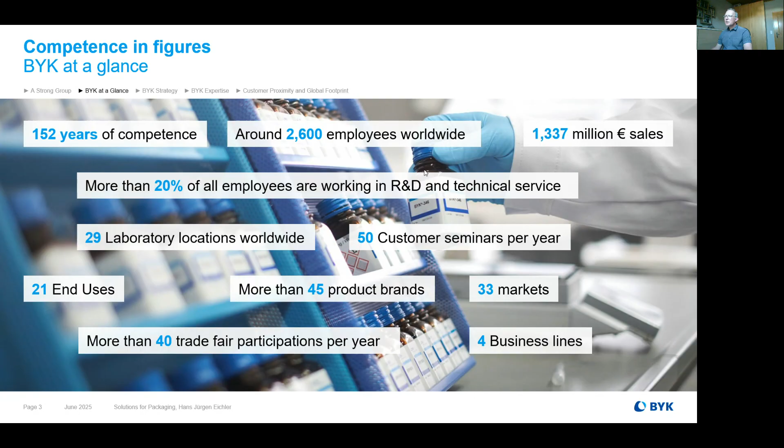A few figures here show how big our company still is and what we are doing in sales. I don't want to bore you with all these figures, but interestingly, we are 2,600 people worldwide. We have 1.4 billion euro in sales. We have different laboratories all over the world, and different production places all over the world.

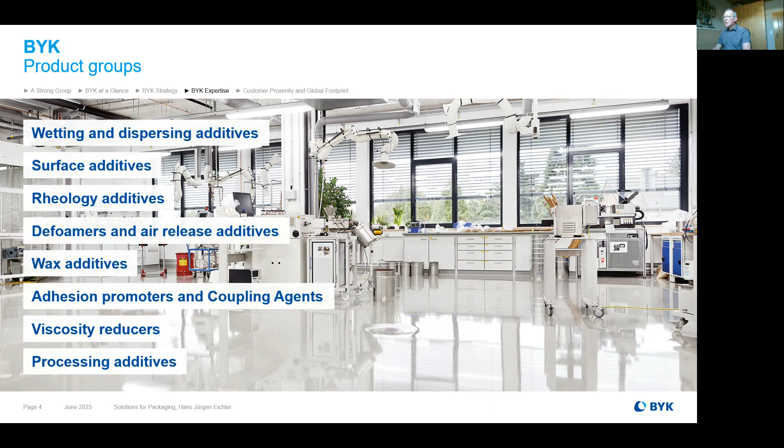The main groups which we are still producing are wetting and dispersion, surface additives, rheology, defoamers, wax, adhesions, viscosity reducers, and processing additives. But that's not all for plastics—BYK is quite great also in the paint business, and I will touch that point a little bit later on. But the main focus for today should be plastics.

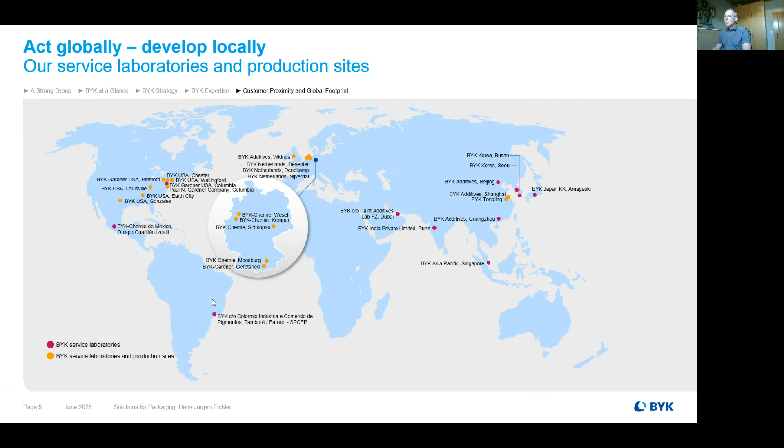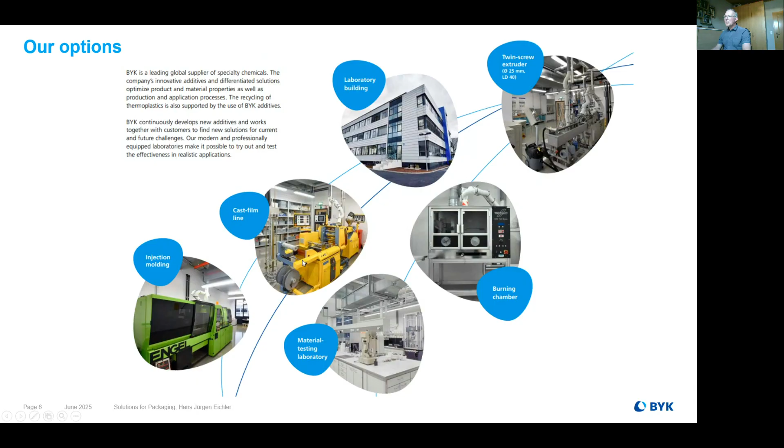Coming now a little bit closer to what we are doing in plastics, you see here our facilities—that's our lab, where we are on the ground floor. That's still an old picture from our twin screw extruder. We have burning facilities to check different flame retardants, a cast film line, injection molding, and several other things to test in our laboratories.

One of the major points I want to touch is that we have 5 thermoplastic brands, let's say it that way. We have BYK-MAX, which are solutions to optimize processing and improve material properties like flame retardants and UV stabilities. Beside that, we have products called BYK that are classical solutions for wetting and dispersion, release additives, rheology and viscosity. And we have our brand called SCONA, which is an adhesion promoter, compatibilizer, and coupling agent.

We have Cloisite, which is a modified phyllosilicate, sometimes called clay. That's used in thermoplastics as a flame retardant, and it might also improve physical properties. Beside that, it also improves barrier properties.

The last brand we have in our thermoplastic group is RecycloBYK—that's still speaking for itself, I think. It's mainly formulations which increase the quality of recyclates. So today I want to focus on not all the brands, because then it would take hours before I have to stop. The major points today are SCONA, so compatibilization and coupling agents; Cloisite, the improvement of the barrier; and beside that, the BYK-MAX materials to optimize processing and mechanical properties.

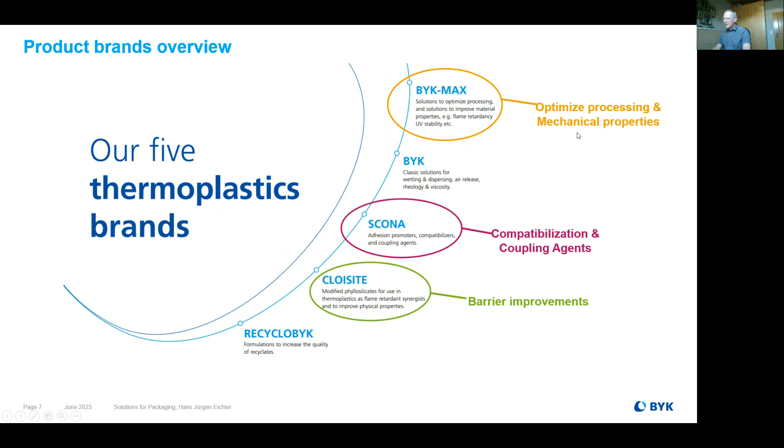Starting now with a short introduction: if we speak about packaging, the major drivers we see in the market are still source reduction—meaning down gauging, lightweighting the packaging—and of course simplification of packaging materials, so color design, and it might be interesting to have mono materials.

The major polymers we see in the market right now are PET, PE, and polypropylene. Besides that, biopolymers are getting more and more interest. There are a few materials which seem to be banned, especially fluorinated substances. Also in packaging, there are issues with processing additives, and of course the recyclability of multi-layer materials. Those are the major points we see in the market for plastic packaging.

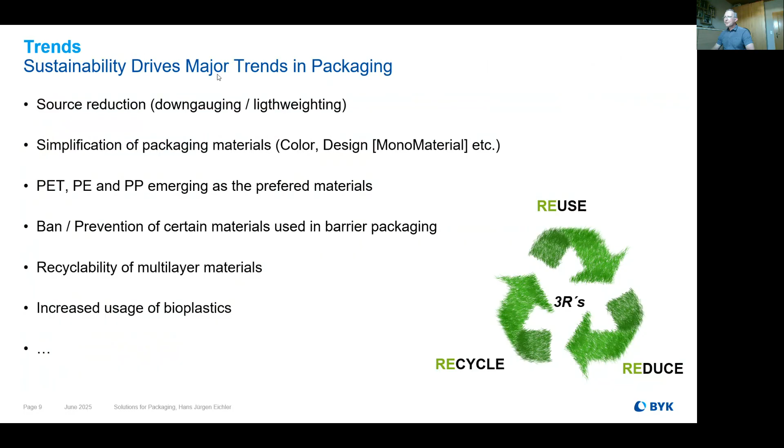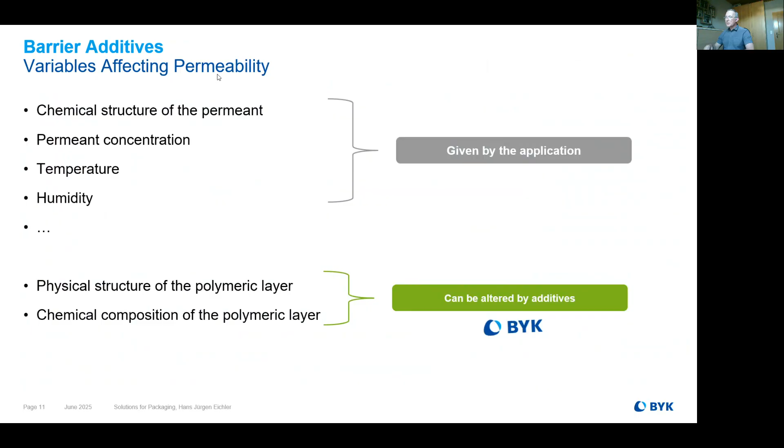So if we focus now on barrier additives, there are variables affecting the permeability. There is the chemical structure of the permeant, the permeant concentration, the temperature, humidity - all that is given from your application, meaning your packaged good which you place in the plastics. Besides that, the physical structure of the polymeric layer is important for good barrier properties, and the chemical composition of these polymer layers is of interest.

How is the permeability measured? There are two important things: one is the water vapor transmission rate, the WVTR, and besides that, the oxygen transmission rate. Those are the major things of interest in packaging goods. And here you see...

A simplified working mechanism of the equipment used to check the barrier properties. You have the film inside, you have the flow of material, call it the carrier gas, and you look at what is passing through the film. Then the water vapor is taken with the flowing gas into the sensor, and it starts to measure the water vapor transmission rate.

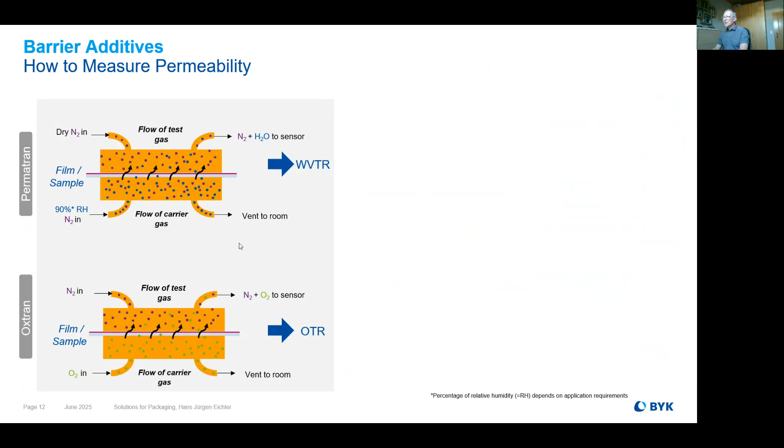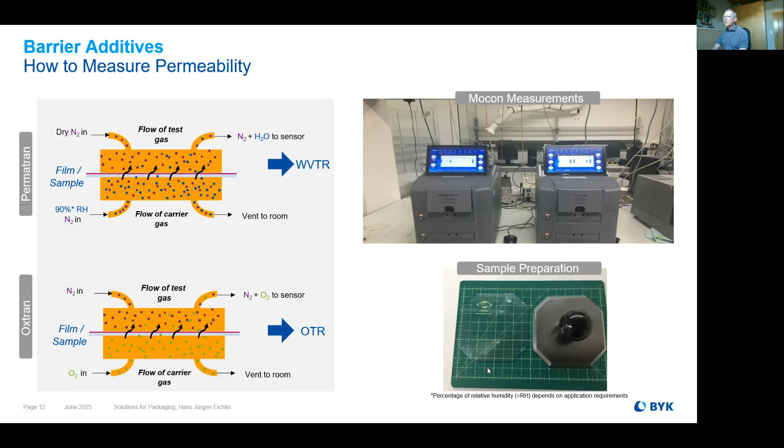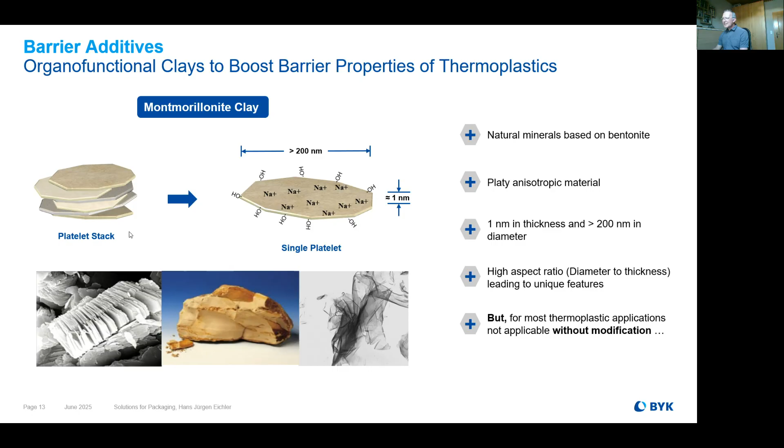We speak of a thickness of about 1 nanometer for one of these pages, and 200 nanometers in diameter. That means the material has a huge, high aspect ratio, which is quite important to get real performance in terms of barrier properties. But the problem is, if we dig it out of the ground and place it into the plastics, we will never get good values, because we need to modify the clay with some organic material.

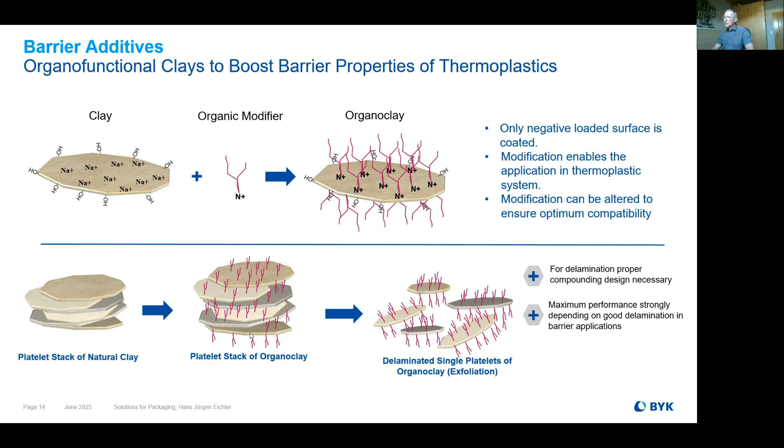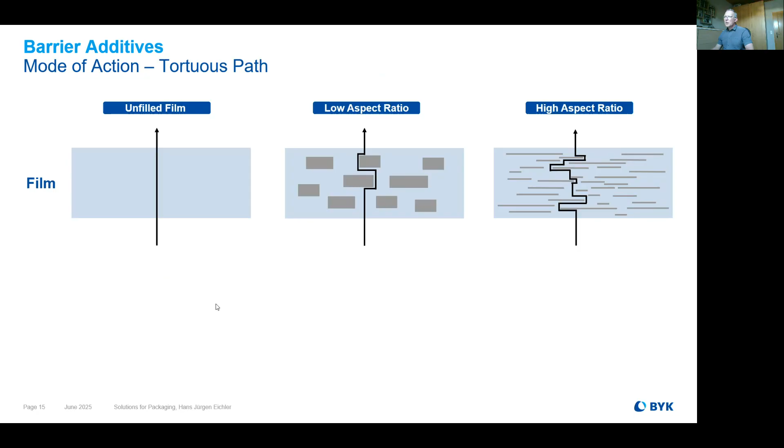With that said, let me give you an idea of how this mode of action works with this mineral. The simple way: you have your film, you have your gas, which passes through without any big issues, coming from this side and going over to that side. So there are no real barrier properties in that case.

If you have minerals like calcium carbonate or talc, they have a low aspect ratio. What happens when you disperse them in the matrix? These gray parts represent the minerals, and the gas passes around them. If you have a product with a high aspect ratio, the gas needs to take longer paths around the particles - and that's exactly what our mineral does. If well dispersed in the matrix, it increases barrier properties due to what we call the tortuous path effect.

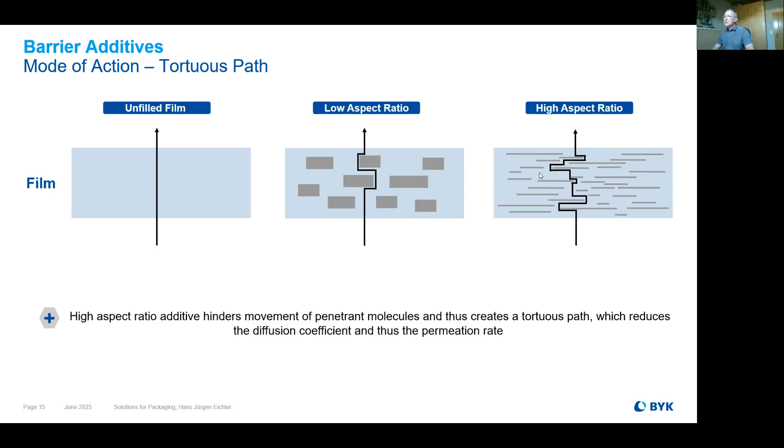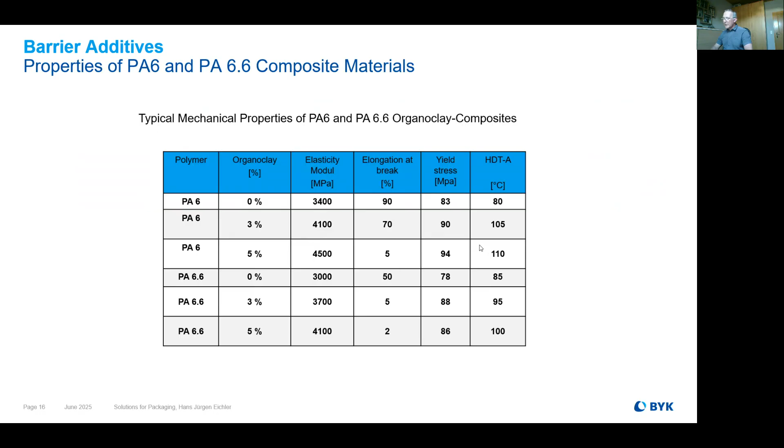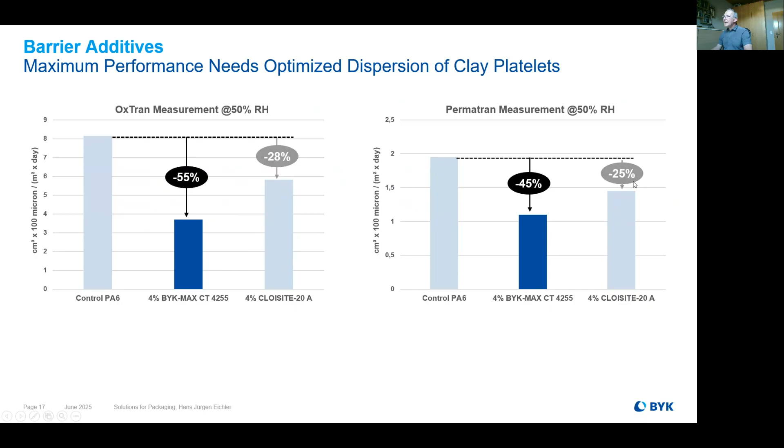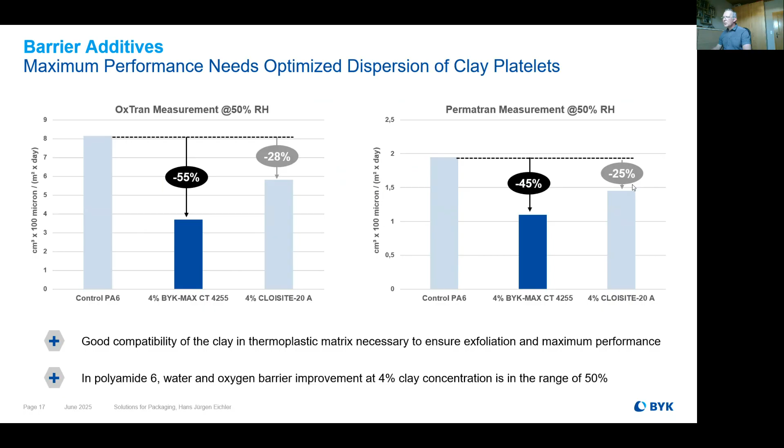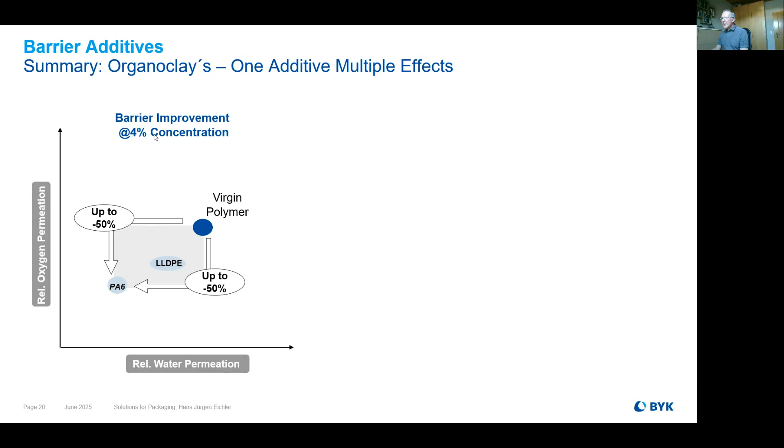And here you get an idea what these polymeric modifiers are able to do. They can work as dispersants, and beside that they can also reduce warpage - that might be interesting for color masterbatch, especially for closures. Beside that, this modifier can be used as tie layers for multi-layer films to improve adhesion between non-compatible materials, or it will increase metal adhesion in film applications. Beside that, it can work as a coupling agent for fiber filler and act as a reinforcing material. It might also be used as an adhesion promoter for elastomeric components, for example for toothbrushes or grips of boxes, something like that.

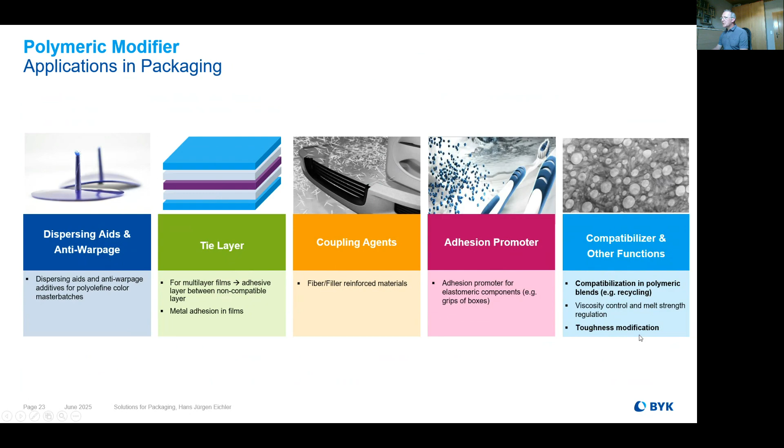And one very interesting part, especially for recycling, is compatibilization. That means if polymers like polyamide and polyethylene, for example, which don't like each other, are in a recycling material, these modifiers still work as a compatibilizer. It can also work as a viscosity controller to improve melt strength - that might be very interesting for biopolymers. And beside that, these materials are also used as a toughness modifier, for example in polyamide.

So if we look now at a use case of these compatibilizers, you still know that the recycling of multi-layer materials is really hard work to do. And to overcome these issues, especially if you have this big mixture of different stuffs, you get something which is inhomogeneous and has poor compatibility. It is very poor in optical or mechanical performance if you want to make films again out of that.

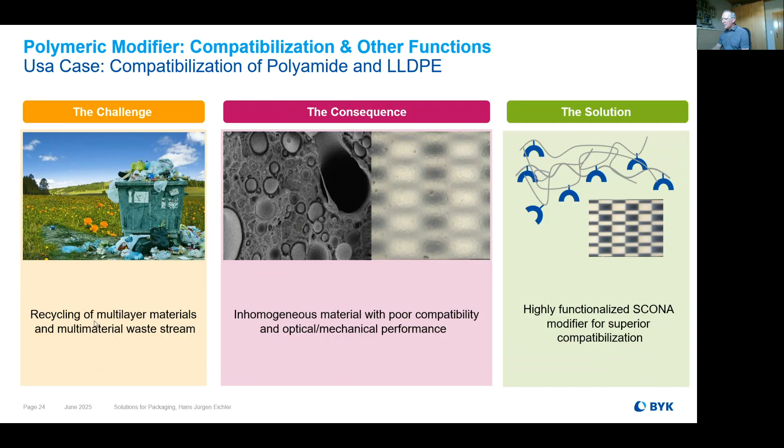Our solution is to work with these functionalized Scona modifiers, which work as a compatibilizer. So here is how it works. We have the Scona modifier, and here these blue half pipes represent the functionality group, meaning we have a maleic anhydride group. For example, if we have a polyamide which has an amine group on one end, it can react with the maleic anhydride.

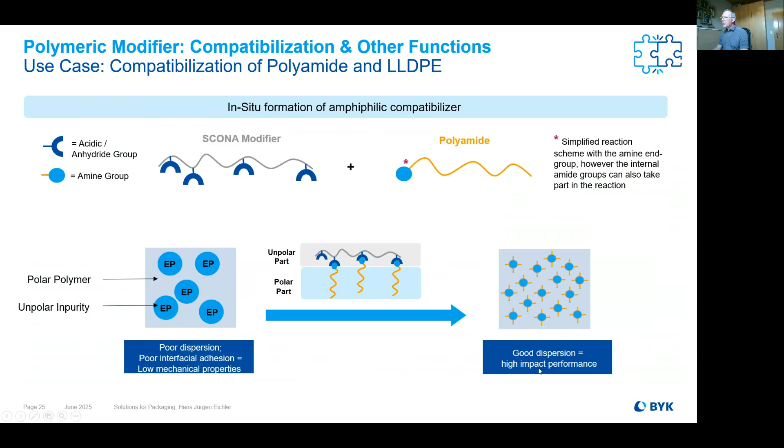What is going on then is you have a compatibilization between the different phases. So you have an unpolar and a polar part which are now really bonded and nicely dispersed, with high impact performance. What that means in a mixture of polyamide and polyethylene, I will show in a few minutes.

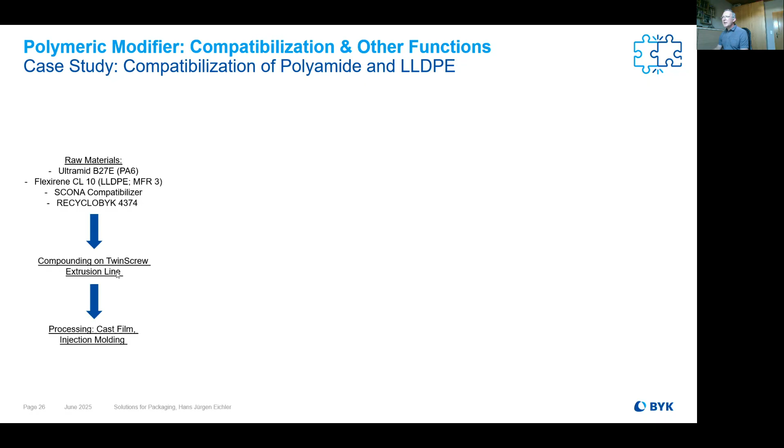So we have done some work with a standard polyamide 6 grade and an LLDPE. We used our Scona compatibilizer and a RECYCLOBYK grade, and did a compounding on a twin screw extruder. With these granules, we went over to our cast film line and did some injection molding, and what we saw as a mechanical properties improvement, you see here on that slide.

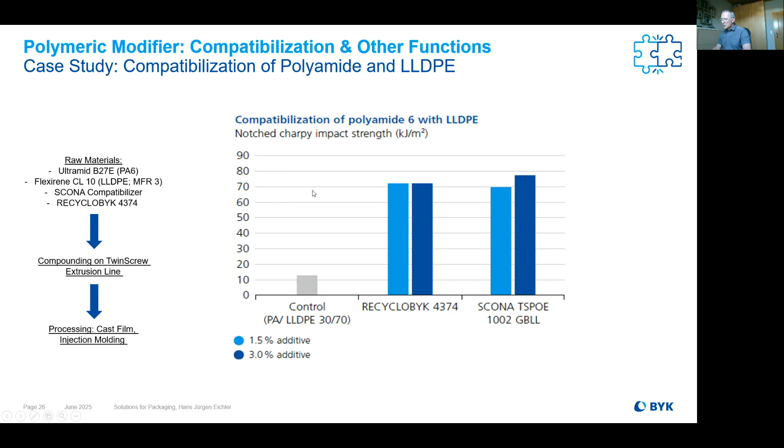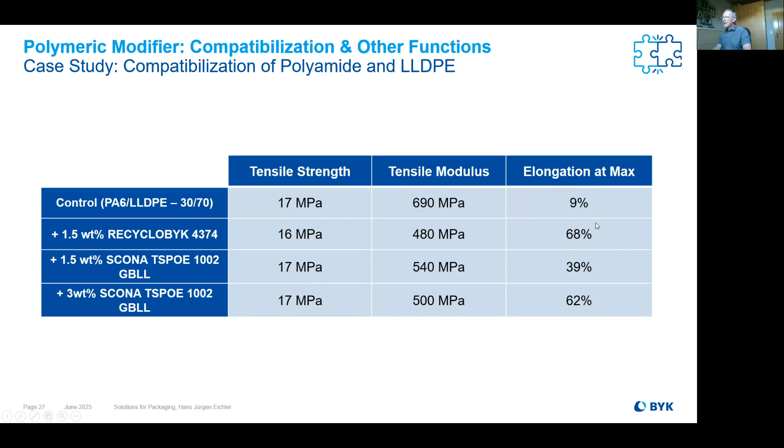Also here an idea for the other mechanical properties, for tensile strength and tensile modulus and elongation at maximum. So you see, especially for the elongation at max, a really nice improvement with our different additives.

So what we found out during our experience, the optimum modifier concentration is already reached in the region of 3%. Especially here for the mixture of 30-70, the notched impact was really increased by a factor of 6.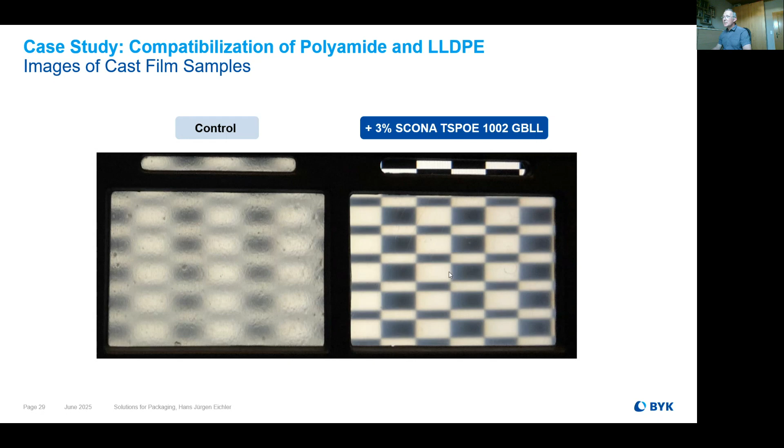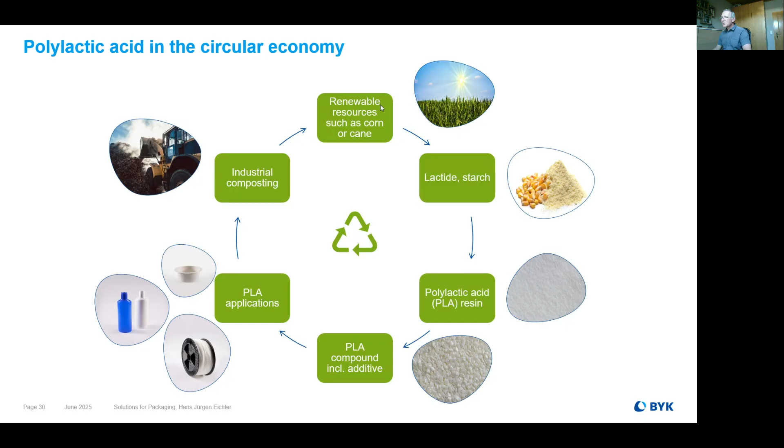The next part which I want to present is the PLA. As you might know, it's still a biopolymer, and especially this kind of polymer is increasing like hell in case of packaging goods. It has a lot of good opportunities, but one of the weak points is that the mechanical properties of this material are not the best. I will show you later on what that means.

For this reason, we have also modifiers which are called the TPPL series. What they are doing is they are still based on a PLA polymer. And we did, you remember our toolbox modifications, with this PLA polymer we were able to run up a modification or grafting with a maleic anhydride, with a GMA, so an epoxide functionality, or an acrylic acid functionality. You see how the materials look like.

It's more or less a powder which we are producing out of these modifiers, and coming now to the point of what it's still doing in PLA.

As I said, the PLA is still bio-based and biodegradable. It has good mechanical strength and high stiffness and medium heat resistance. It is transparent with good printability, but the major weakness for this material is it has low melt strength and melt elasticity. Beside that, the flexibility, or impact strength, is really limited.

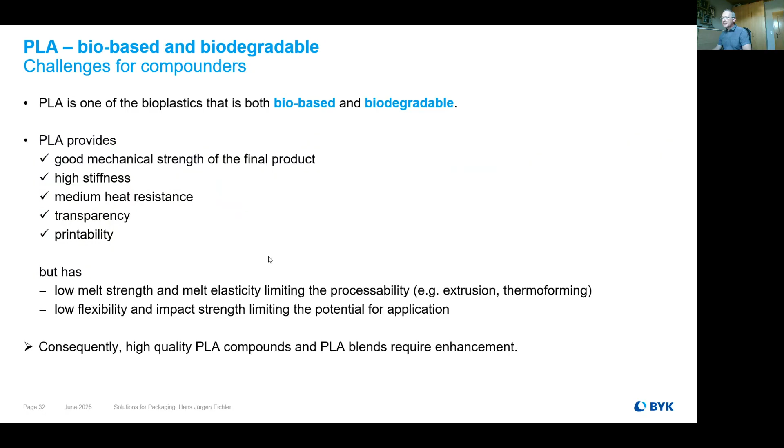That's the reason why a lot of people do mixtures with PLA with different blends. And here is coming now the point where our product might help. I will show you what that means.

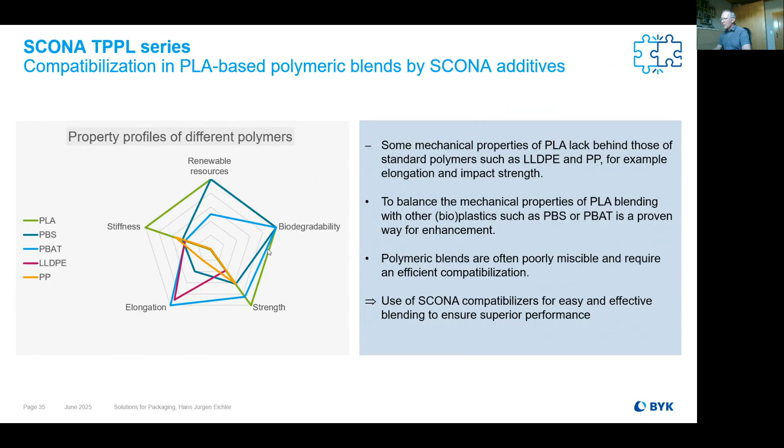And here again our SCONA compatibilizer can help incorporate these different bio-based polymers, same mechanism like I showed for the polyamide PE modification, but now we have other partners to play around with. We have, of course, again a maleic anhydride SCONA material, and we have a blend partner, which might be the PBS or PBAT. The SCONA PLA modifier reacts with the blend partner and creates a good dispersion and improved mechanical properties and adhesion from the materials.

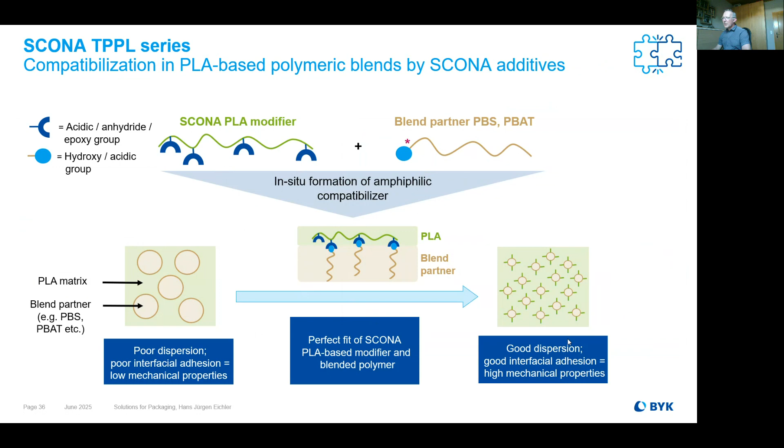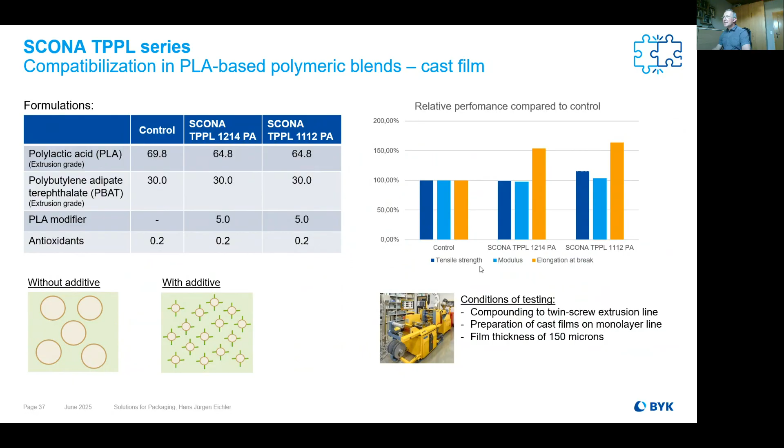That's what you see here on the figures. We did a mixture with PLA and PBAT with nearly 70 and 30. We added some antioxidants, and we placed in here the PLA modifier. The 1214 is a GMA material, and the 1112 is an MSA grafted material. You see here the improvements in elongation at break with similar values for the tensile strength. This gives you an indication that these products help bring better compatibilization between the polymeric blends.

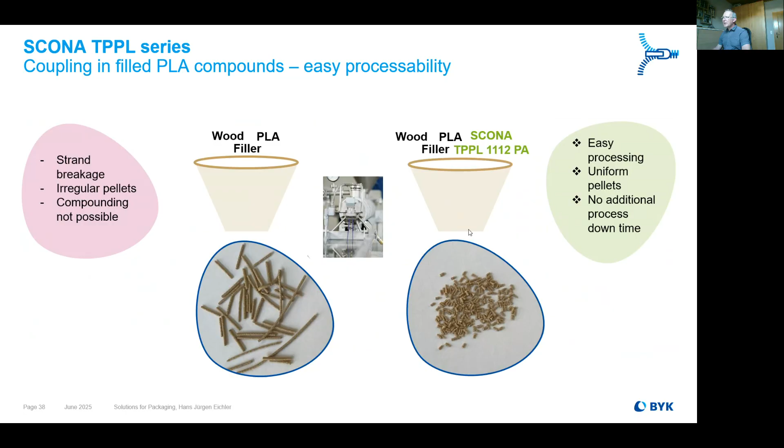Besides these polymeric blends, PLA is quite often filled with wood as a filler, and here the SCONA materials can work as a coupling agent. There is a bonding between the MSA group and the OH groups, which are quite abundant on the wood. This gives better bonding, meaning better mechanical properties and reduced water pickup. All nice things to have in a wood-filled system.

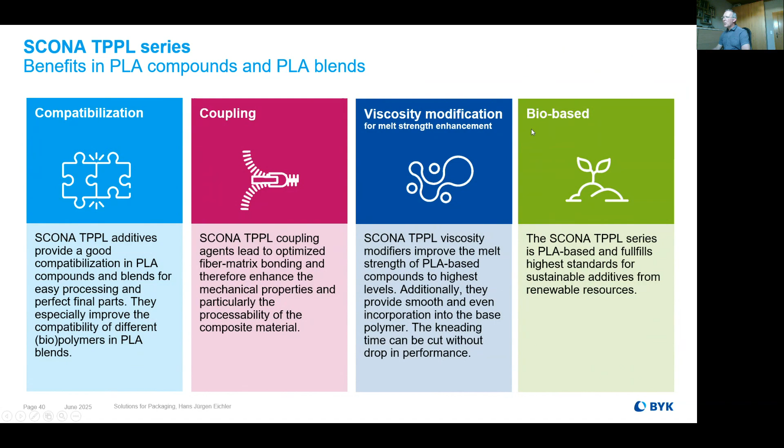So what we can say is the benefits from our PLA grafted materials is it can work as a compatibilizer between the different polymers. It could work as a coupling agent if we have, for example, fiber matrix bonding needed, or it can work as a viscosity modifier to improve the melt strength. And the interesting thing is, of course, all of them are still bio-based and also biodegradable.

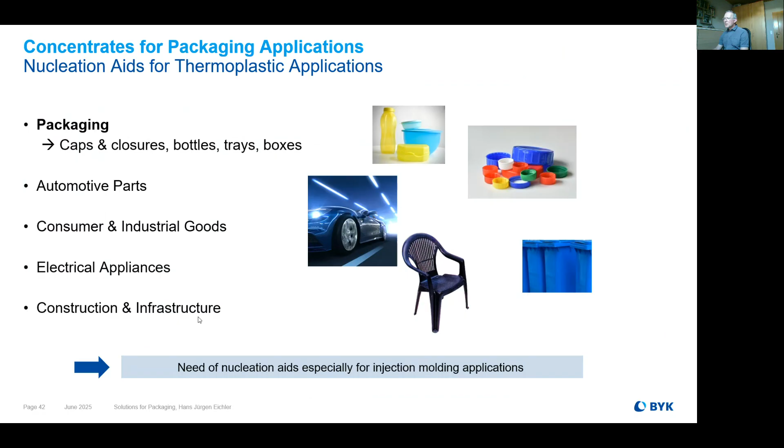Coming to the last point of my presentation with the nucleation aids, you might know that these nucleation aids are still often used in thermoplastic applications for caps, closures, and trays or boxes. So you see these different pictures here. In application, it means it is quite often used for automotive, electronic parts, construction - anywhere injection molding is taking place. We have two grades, I should say.

The functionality is, of course, nucleation. We have this BYK-MAX NU 4230, based on a polypropylene or based on an LDPE, depending on the polymer you're using. The processing methods are quite huge, so it means you can use it for blow molding, injection molding, extrusion. It's based on pellets. Typical dosage is between 1 and 5%. This 4230 material is just a combination of output and dimension stability and quality improvements.

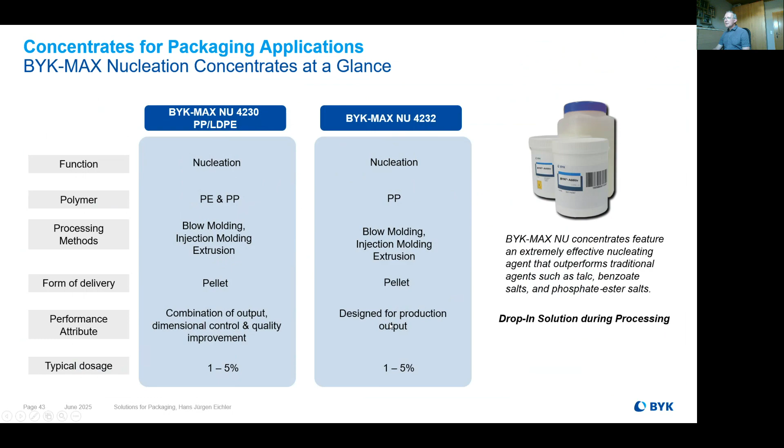Compared to that, we have the 4232. That material is based on polypropylene, and that's designed to improve the output. I will show you in a few minutes what it means.

So generally spoken, what are the nucleation agents doing? If you have non-nucleated polypropylene, for example, the nucleates start to build up huge and small and very inconsistent particle size of the crystallinity phases. So that means the mechanical properties could also be reduced.

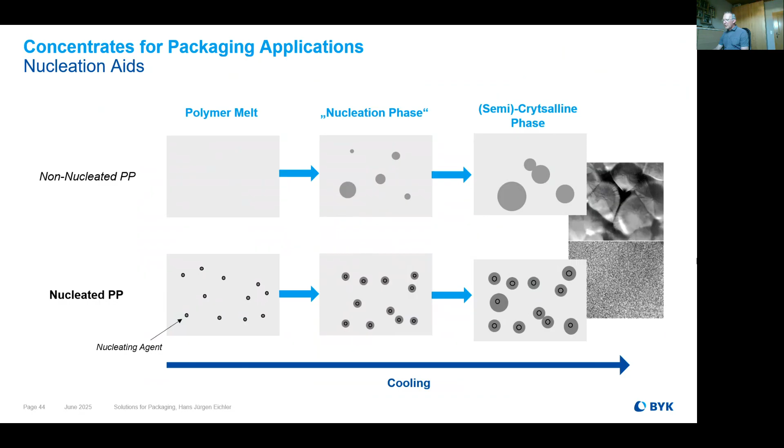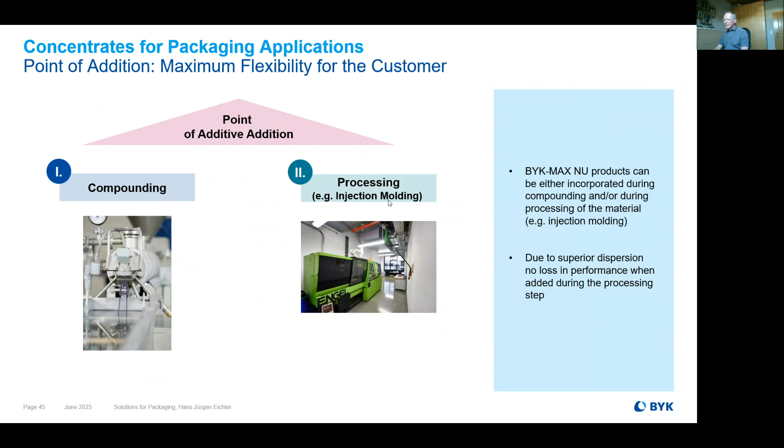If we have a nucleated polypropylene, with the nucleation we can control the size of the nucleates, meaning the crystallinity phases are really controlled, and we have a unique view on these things. That really improves mechanical properties and also helps improve the output on the machines. So the materials can be used during compounding or also during processing - it's very general use of the products.

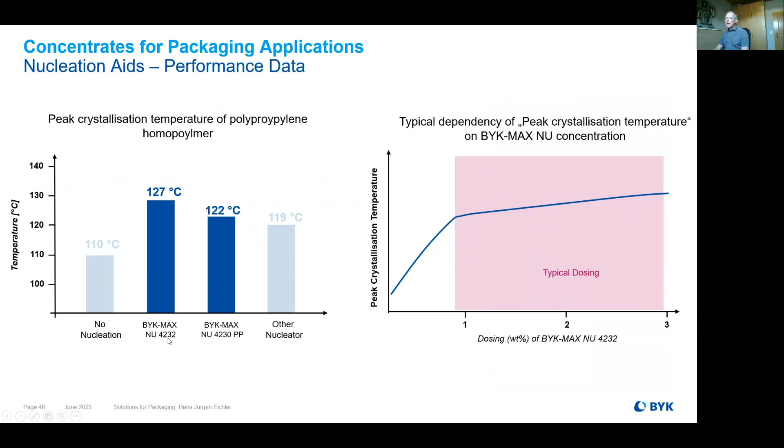And if we start here and look into the processing, you see the 4232 is just a product which has a very nice and high peak of crystallinity. It's 127, higher compared to what we have with a non-nucleated material, meaning you are able to form out your products quicker. The 4230 also has nice improvements, but not on the same level as the 4232.

If we check now mechanical properties, you see now the advantage of the 4230. This is shown here in tensile modulus and in tensile strength. You see that the values from these products are at a slightly higher value compared to the 4232, which is doing a quite good job. But as I said, 4230 is optimizing mechanical properties.

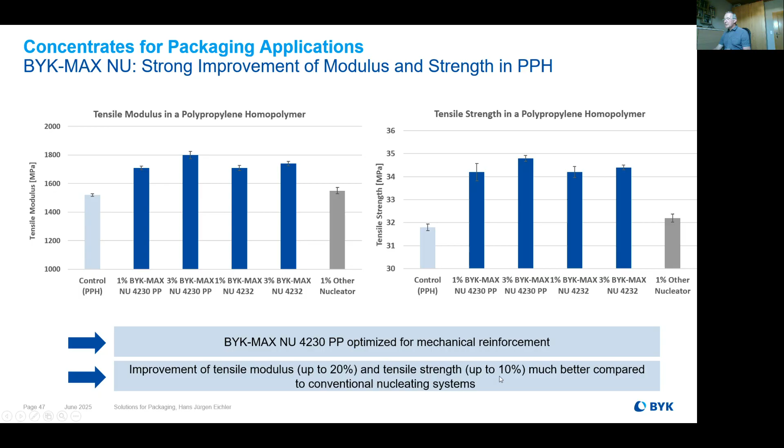On the gray side, you see other nucleators which are also doing a good job, but compared to our material, we are more efficient, also with lower amounts. As a summary, in case of the tensile modulus, we can really increase it up by 20%, and tensile strength is increased up to 10% with both materials.

So that is the benefits of the nucleation aids: it means you can reduce the anisotropic effects, so it might reduce shrinkage, and keep your dimension tolerance and warpage reduced. So effects which are coming with pigments, especially phthalo pigments, are tending to cause warp. The nucleation effect will help here from the nucleation agent to overcome these points of the pigments.

It will increase the crystallinity and might improve the stiffness and impact, HDT, and CLTE, and of course the cycle time is reduced, meaning you get more parts out of the mold and you can form it out quite soon.

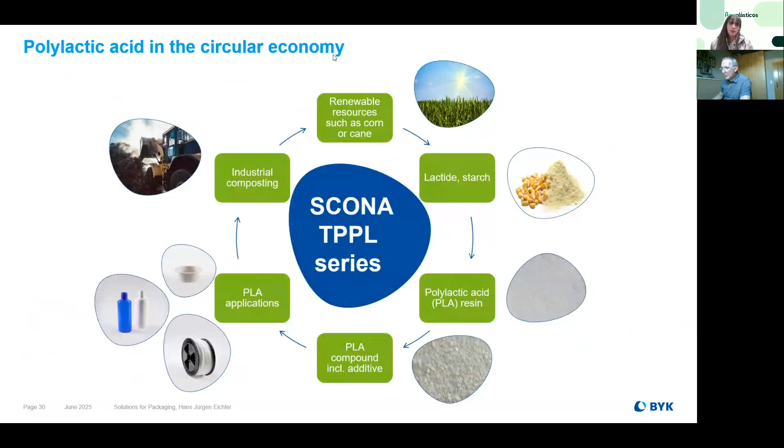Okay Hans, thank you. They're asking a little more about whether these clays reduce oxygen transmission. Yes, that's still used, as I showed here a few slides ago. Here you see the Cloisite 20A used in an LLDPE. Here's the water vapor transmission, and here is the oxygen. You see with 4% of clay, you get really a 30% improvement for the oxygen.

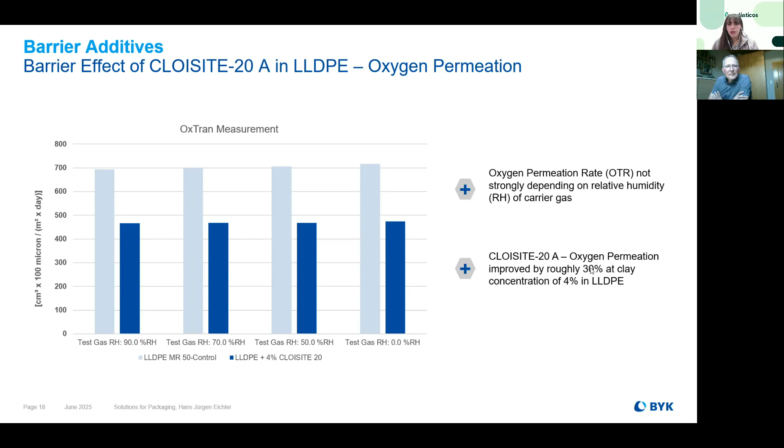Okay, we have another question. Can the SCONA for PLA be used directly into the extruder, or is it better to pre-process it? It should be processed in a twin screw extruder. It needs a real compounding step to introduce these materials to get out this strand widening. It's not enough to work with it as a compound or concentrate. It needs really a compounding step, meaning a twin screw extruder. In a single screw, I don't expect it gives the full performance.

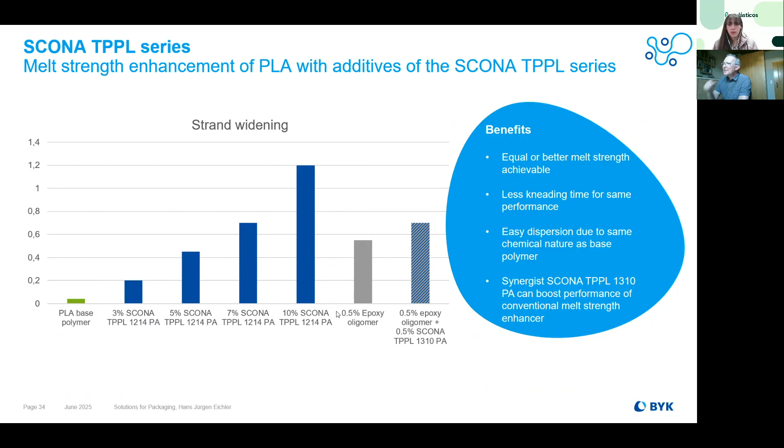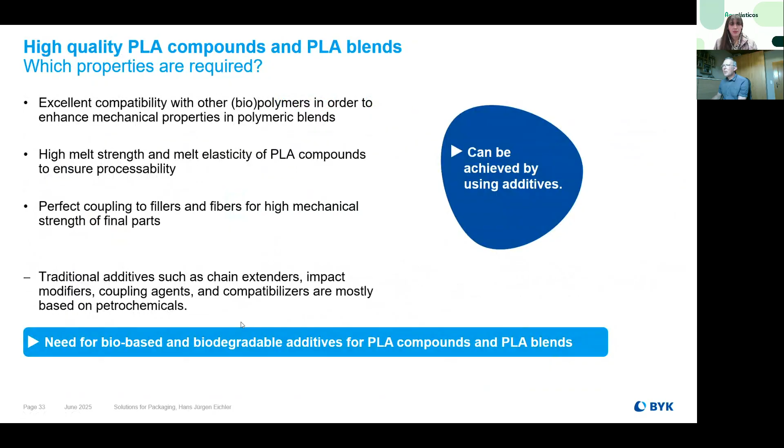All the grades we have here from these PLA-based modifiers are powders. The reason is, if we make granules out of the powder, they start directly to react with themselves. That means if you have it as a powder, it still has the functionality. But if we make a granule out of it, there's no chance to have the real functionality because it tends to react with itself. That's the reason why we have it only as a powder.

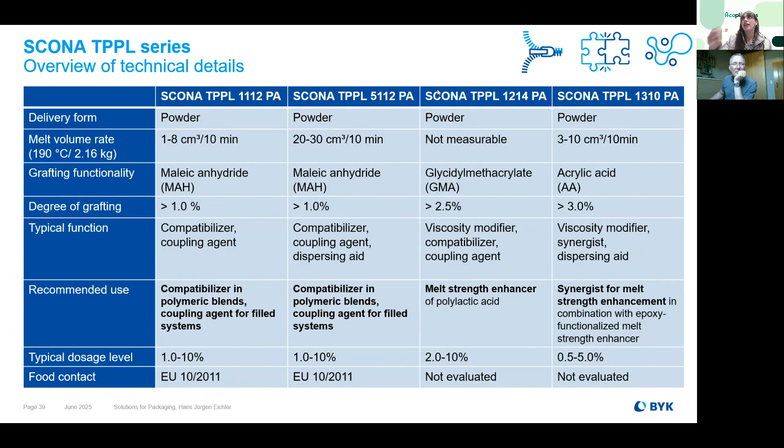So thank you very much Hans, we had around 47 people joining us. Aleja is going to talk with Carolina to send her all the information. I think this is all for today, but thank you so much. I'm sorry you had a little trouble connecting at the beginning.

No, that's, as I said, I'm not the best with electronics and computers, and I was so happy that it still works. I get you, I feel you. But everything worked right, and we really had good timing for your presentation. I think it went great, really well. Yeah thank you, Hans. You're welcome. Maybe next time I come over to Colombia and do it personally, directly.

Awesome, yeah that would be awesome. You can come for Colombiaplast, that's our trade fair next year. Is it every year or which season are you going? It's every 2 years, normally in September. Okay yeah, let's see. Carolina, Hans, thank you so much. You're welcome, my pleasure. Bye bye, thank you, bye.